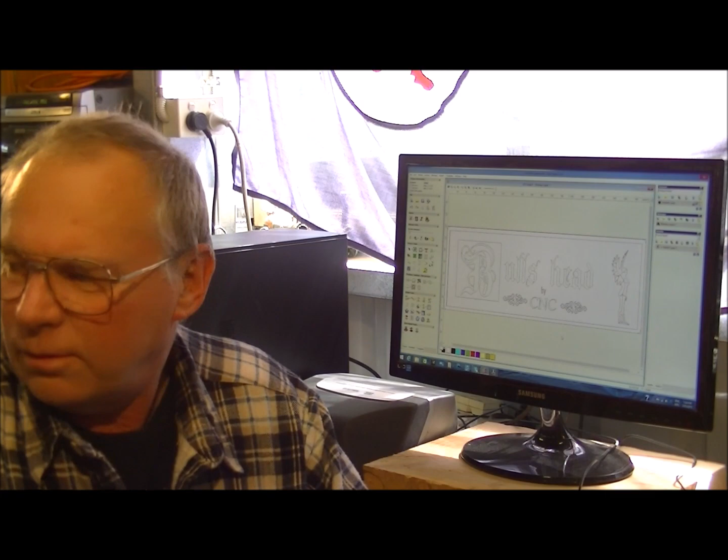This week we're going to do another relatively small, easy job on the CNC. We're going to make this sign, my version of the bull's head sign that you may have seen other CNC operators make on the internet.

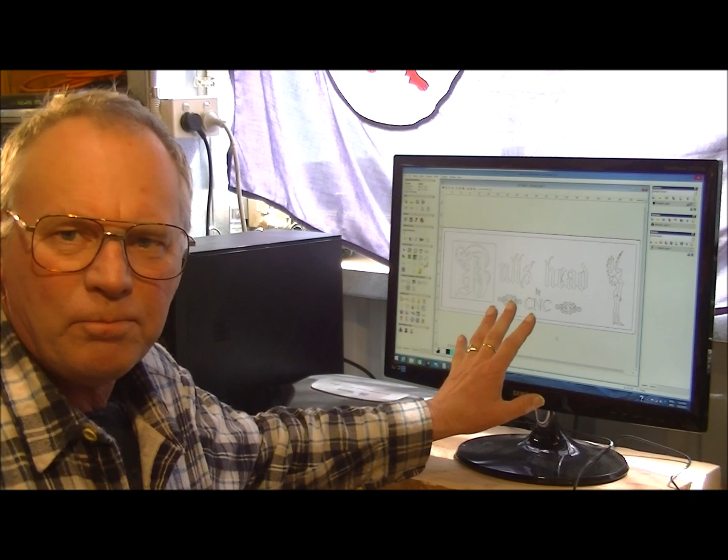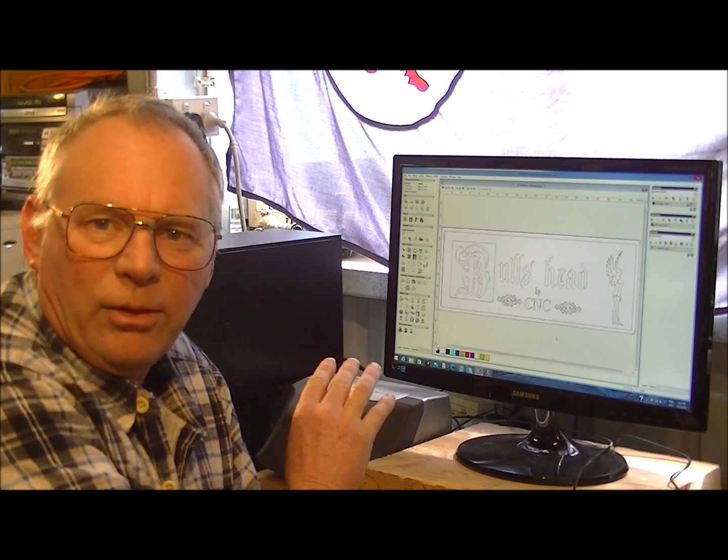I'm making this in ArtCAM, in Old English type lettering, with a little figure on one side. If there's enough interest I will dedicate a video on how I put this together. For now I'll just run the program and show you how the CNC is going to cut it within ArtCAM. That's it as I've drawn it out, and I've already constructed the tool paths. That's a bit long-winded for this video, but I will show you how that's done.

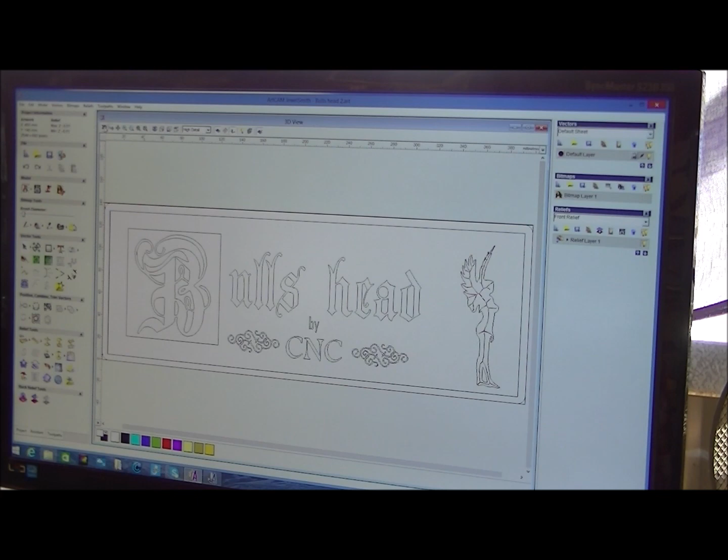So this is the 2D image, this is the 3D image, and we'll now simulate the tool paths. It won't obviously be as quick as this in real life, but we'll speed this process up.

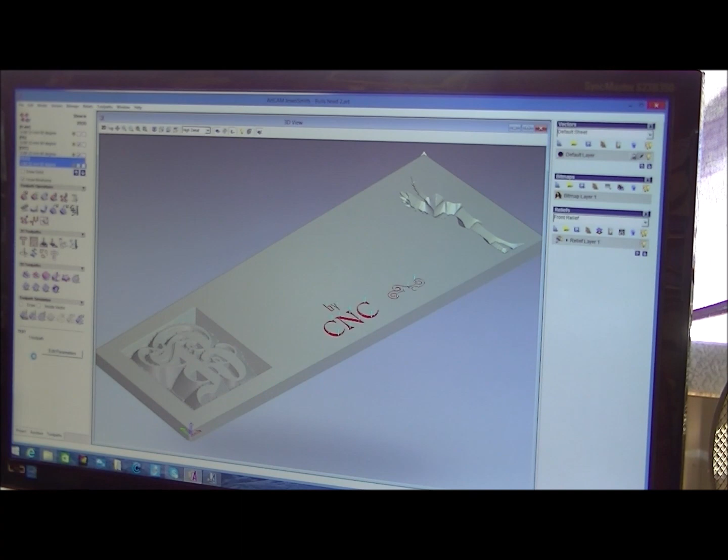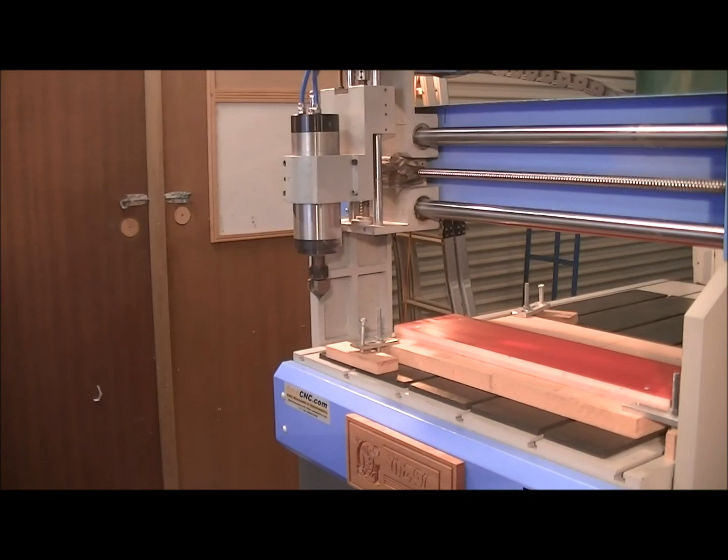When we start a new job, the machine starts up in its home position, which means the gantry is as far forward as it can come, the carriage is as far over to the left as it can be, and the spindle is as high as it touches the limit switch. There's a limit switch here, one in here, and one inside here.

That registers as all zeros on the DROs, the digital readouts for the X, Y, Z and A, or fourth axis. All we're concerned about is the X, Y and Z axis. So that is the machine zero, or the home position.

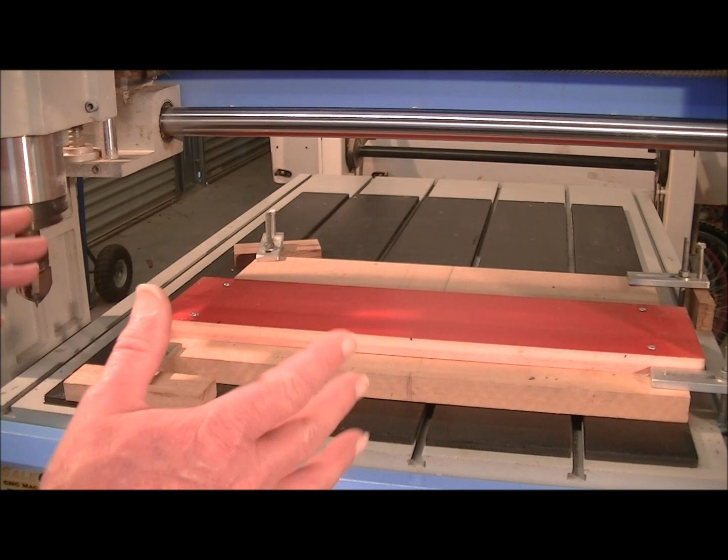Okay, this is our piece of work. The end product is going to be 400 millimeters long and 140 millimeters wide. In this case we start the work offset right at this left hand front corner, which is the norm. I actually switch depending on the job, whether I start dead center of the material or on this front left corner.

I'm happy with the X and the Y, so all I do is go X0, Y0, and now I've got to find the zero point of the Z. All you do is get a bit of paper like this, and bring it down till it just grabs. There you go.

Okay, so now I can load the first G code, which is the rather flamboyant letter B. So it's load... come on, computer. Okay, it's loaded.

The next file I've put in now is the little figurine on this end, so we'll just start that up.

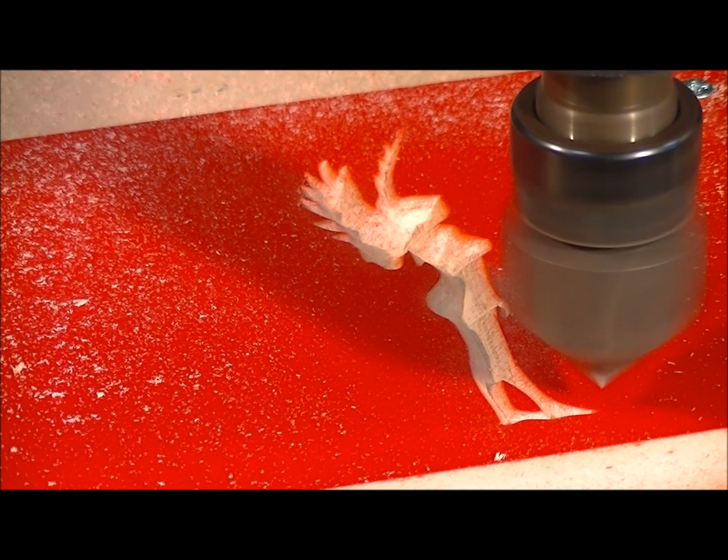Okay, the next code to go in is the text, so we'll zoom back out. It should be somewhere in the middle there. So we'll give that a go.

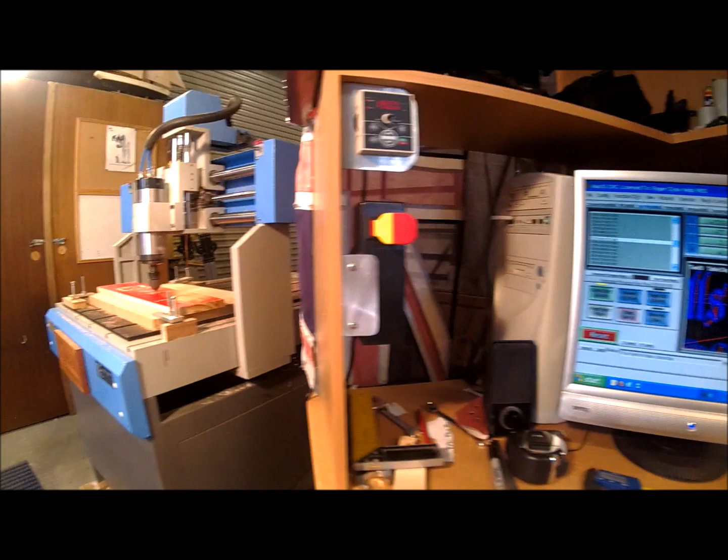That's looking pretty good. The only one I'm not totally happy with is those two letters there, the 'by'. But yeah, it's not bad.

Okay, the next one I'm going to run now is just to put a chamfer around the outside. That'll be a fairly quick one.